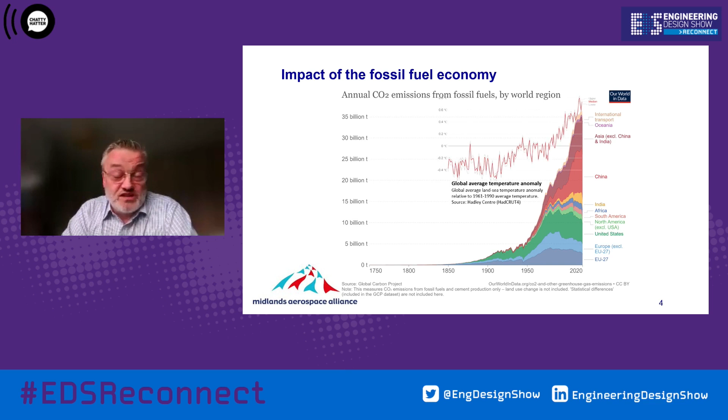So even if we froze the output of greenhouse gas emissions instantaneously, we'd still see an increase in global temperature. And the latest IPCC report is sobering reading, shall we say.

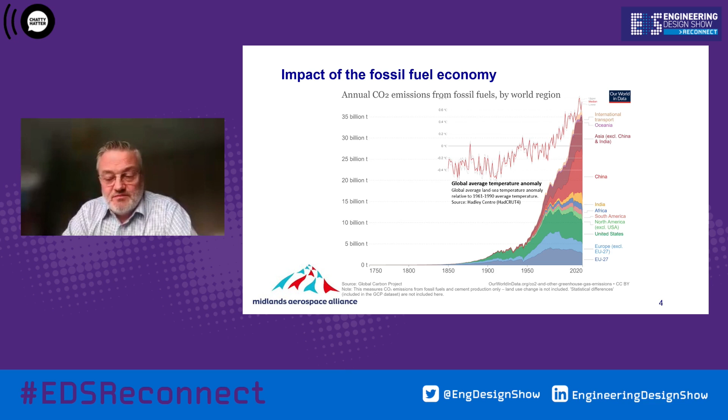With respect to aircraft, it's absolutely appropriate that we consider greenhouse gas emissions—carbon dioxides, methanes, nitrous oxides, fluorinated gases. These are the ones the Kyoto Protocol defined as greenhouse gases, and typically you see them summarized as measures of tons of CO2 equivalent, standardized into a standard measure.

But in aerospace, we also need to consider the impacts of NOx, smoke, and water vapor that turns into contrails. That's something the industry has actually been working on reducing for some decades now.

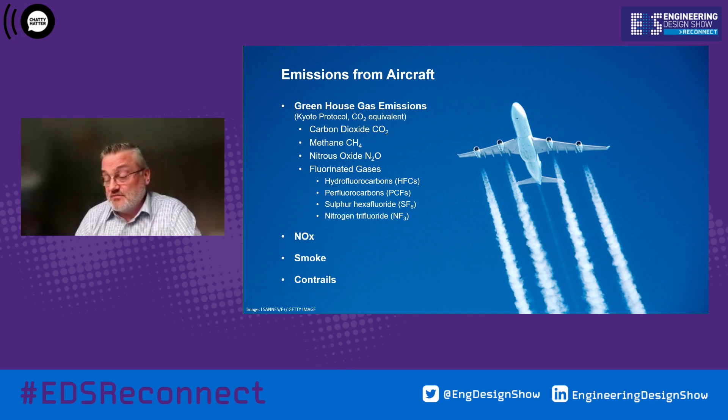So let's have a look at aviation fuel burn by sector and the amount we get through—it's quite a thirsty industry. Global annual aviation fuel burn in 2019 was 401 billion litres.

There are predictions this will increase—most assume there's going to be some sort of growth in air travel. So, no surprise, by 2050, if we do nothing else apart from modestly improve engine performance, we'll be increasing the amount of fuel we burn. Estimates vary, but typically doubling from where we were in 2019 is typical.

Just to give you a flavour, before the pandemic, London Heathrow Airport was getting through about 22 million litres a day of aviation fuel. The chart on the right shows which sectors are spending this—your small turboprops, regional jets, and business jets account for some 7% or so of fuel burn.

The area we really want to focus on is your single aisle, narrow body aircraft—A320s, A220s, Boeing 737s, etc.—typically reasonable short haul that you go on holiday to, or your transatlantic wide body aircraft, trans-Pacific, twin aisles—they're 57%. So those are really the ones we want a solution for.

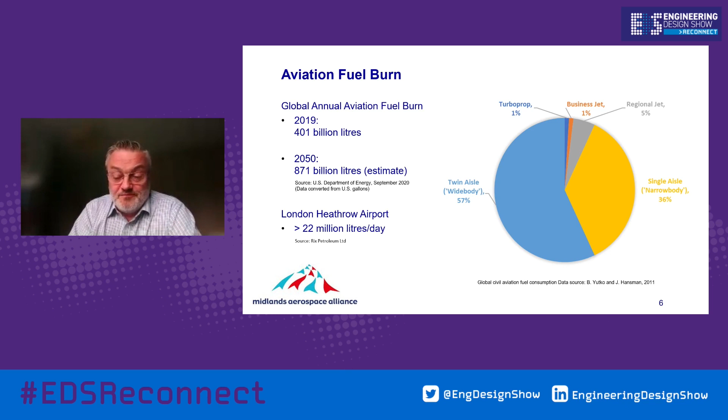So to summarize the problem statement: today the majority of commercial aircraft burn Jet A1 fossil fuel, or Jet A, whatever you want to call it—aviation fuel. Narrow body and wide body aircraft account for approximately 93% of this. Aviation is still predicted to grow, and improvements in aircraft and flight operation efficiency alone won't actually reduce this fuel burn.

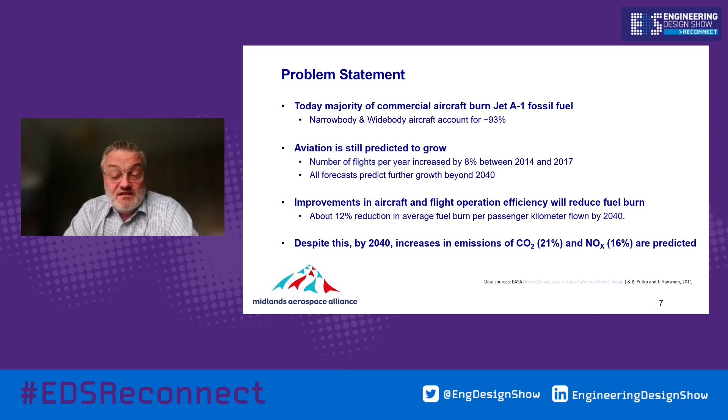So clearly there is a problem statement—we need to do something about this, and that's really where we're going to go next. Apart from one point I'd like to make, and it's a kind of sobering point.

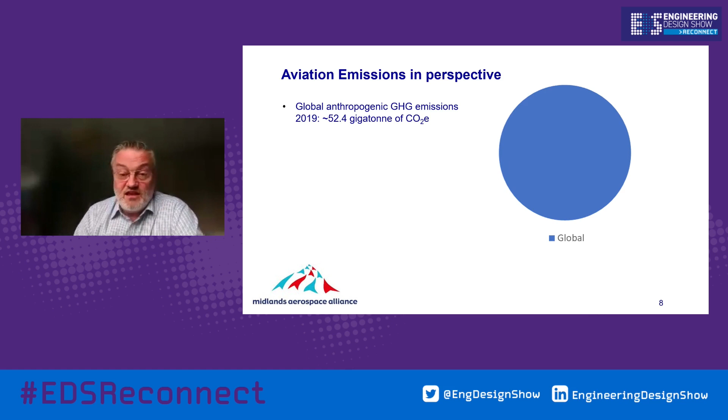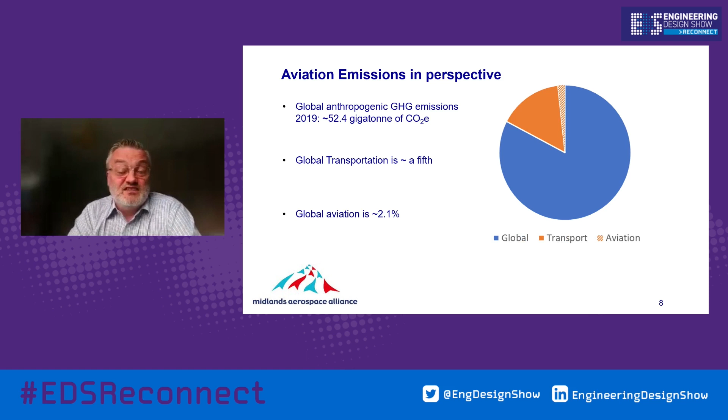If you look at global greenhouse gas emissions due to humans, in 2019 this was some 52.4 gigatons of CO2, and if we cut out global transportation, it's approximately a fifth, and then aerospace is about 2.1%, give or take, of that.

Clearly, you could argue that aviation is a relatively small impact on global emissions.

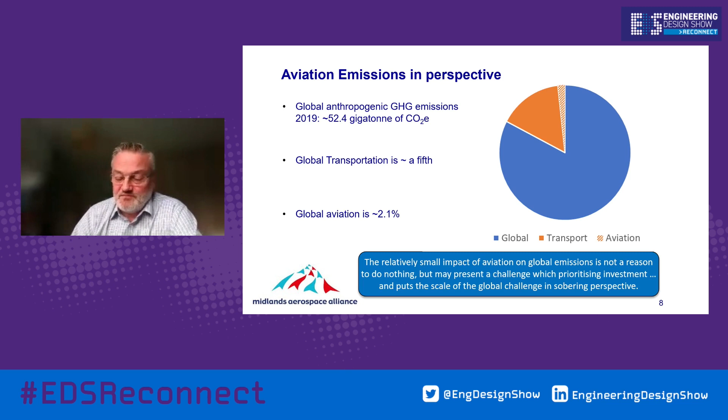But there's two points worth highlighting. Number one, this is actually an issue because it could be a factor when people are considering where to make investments and prioritizing them. Number two, as other areas improve, if aviation does nothing, it will become a larger proportion of the problem. So what are the strategies for actually low or zero emission aircraft?

I'm going to spill the beans upfront, and this is a bit of a spoiler chart, but the way I see it there are 4 key strategies, the 5th being stop flying, but I haven't considered that in detail. One approach is to reduce fuel burn, another is to use sustainable fuel, a net zero fuel as I've called it. Don't burn fuel, find another means of powering your aircraft, and don't burn fuel that contains carbon. All the answers are there, but we'll come on to those individually.

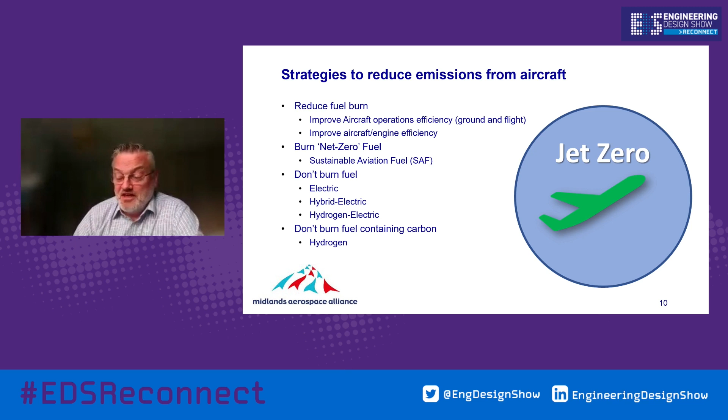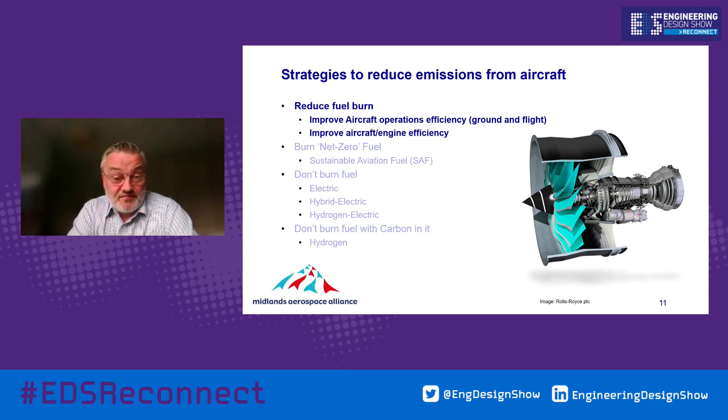So let's look at reducing fuel burn. There's two items here really: aircraft operations, and the actual airframe and engine itself.

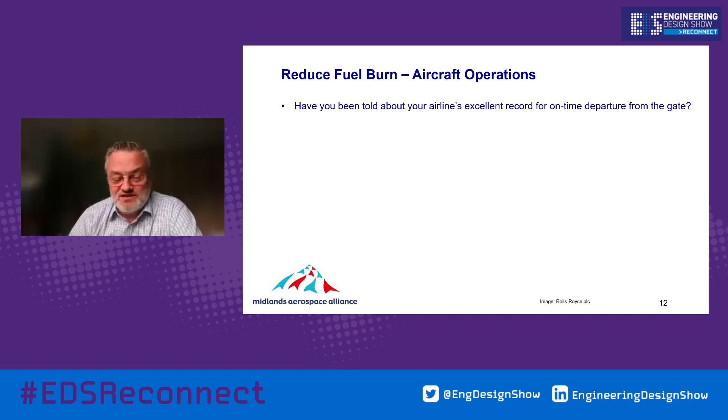So I was just thinking about flights you've had. These are rhetorical questions, but have you ever been told about your airline's excellent record for on-time departure from the gate? Some very impressive numbers are quoted. But I would add to that, have you ever been on board an aircraft sitting in a queue on the runway prior to takeoff? I have done that in certain cases for over an hour.

And in one case, we actually had to turn back and refuel. So I think perhaps gate departure isn't really the right measure for sustainability. Perhaps we should be thinking about the emissions produced during ground taxiing and setting some standards against that.

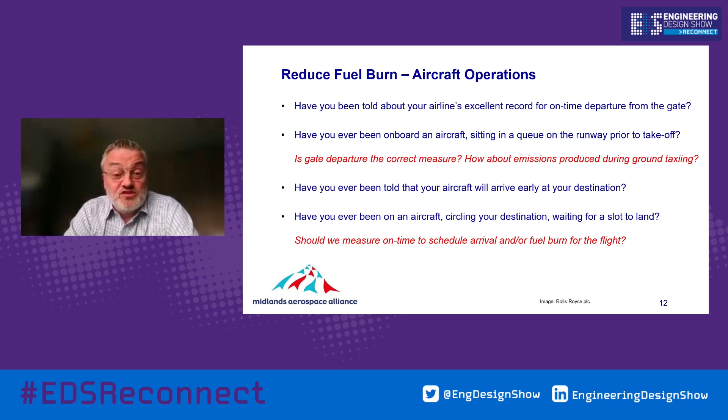The other one that really frustrates me is, have you ever been told that your aircraft will arrive early at your destination? Well, around busy airports, that usually means one thing, and you end up circling around, waiting for a slot to land because you've turned up early. Essentially it's a very inefficient way of operating an airframe, and you're burning more fuel. So perhaps we should measure on-time scheduled arrival, or maybe the fuel burn used in the flight.

But I think there's lots of scope for operational improvements, and indeed there are activities ongoing that could have immediate effect. Some quotes say 5 to 10% difference. I wouldn't argue with that. I think this is a massive opportunity. There are more technically challenging concepts about flight paths, etc., but those two can be readily introduced.

What's more challenging and more difficult is when you want to actually improve the efficiency of the airframe. Now, I have an aero engine background, more on the equipment systems side, but supporting aero engine manufacturers as well as airframers. So I'm going to focus on engine performance largely.

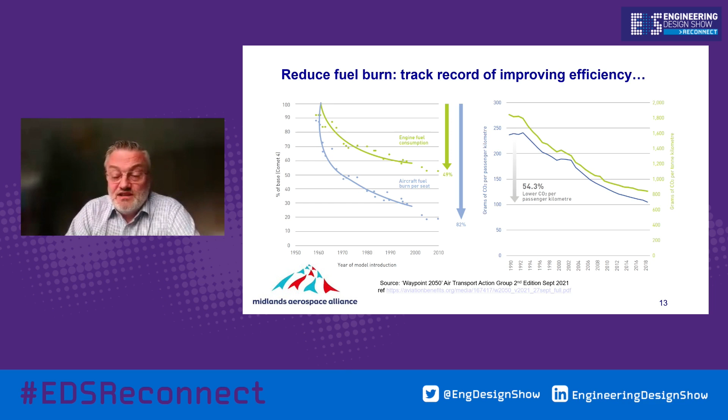As you see, we have, you could argue, a proud history of reducing fuel burn. I also emphasize that the industry has been very active on reducing NOx emissions and smoke emissions as well. Over the last 10 years or so, $150 billion of R&D has been spent to improve the engines alone, so it's a big factor. However, one thing we notice from these charts is it's starting to get more difficult to make significant steps in efficiency. What the engine manufacturers are looking at now is improving propulsive efficiency.

Essentially, you've got two options with a gas turbine. You can either focus on thermal efficiency, where we've seen approximately 0.4% per year improvement since the 70s, and that's really around the combustion and turbine area - running it as hot as you can without affecting life, and also giving consideration to how hot you run your combustion for NOx, but really it's focused on the turbine stage.

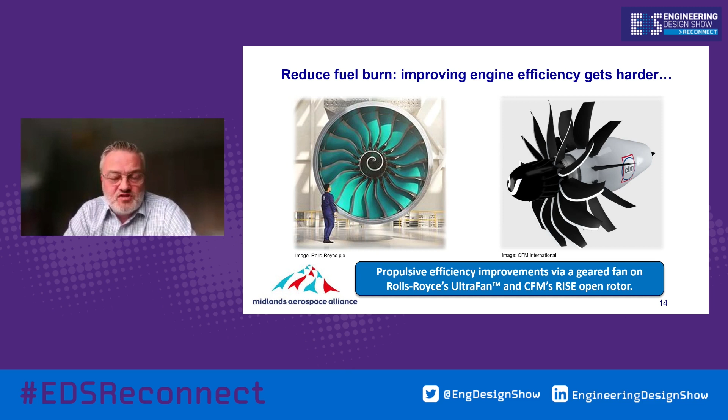And on the right there you have the CFM, which is a 50-50 venture between GE and Safran, where they're returning to the concept of the open rotor. Neither of these concepts are actually brand new. Frank Whittle sketched out a geared fan back in the 40s, and open rotors have been tested - GE did one, and also Rolls-Royce in North America. So again, not necessarily new concepts, but really making that step change in technology to improve efficiency.

But we're still burning fossil fuel. So what's the alternative to burning it? Even though we can burn it more efficiently, what could we actually do to improve the emissions and carbon footprint of aviation? So that brings us on to sustainable aviation fuel.

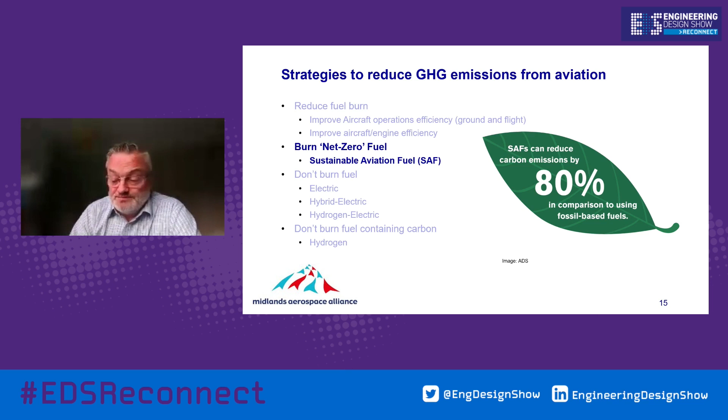So this is not about not burning fuel and not producing emissions. It's about a way of balancing it. So it's a net zero solution. And some studies estimate that if done correctly, this could achieve some 80% reduction overall.

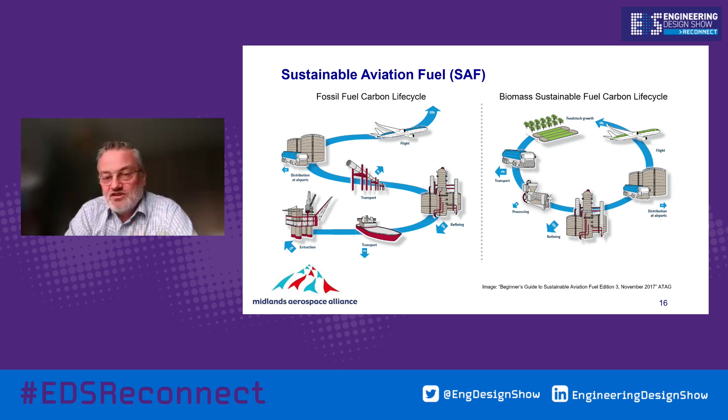So just to have a quick look at the process - and this is a highly simplified summary, so I apologise if you were looking for something a bit deeper - essentially, take your feedstock and you pre-treat it. The feedstock can be biomass, wood pulp, waste - some really exciting stuff being done processing waste and converting it to fuel. Then the conversion process itself produces SAF fuel.

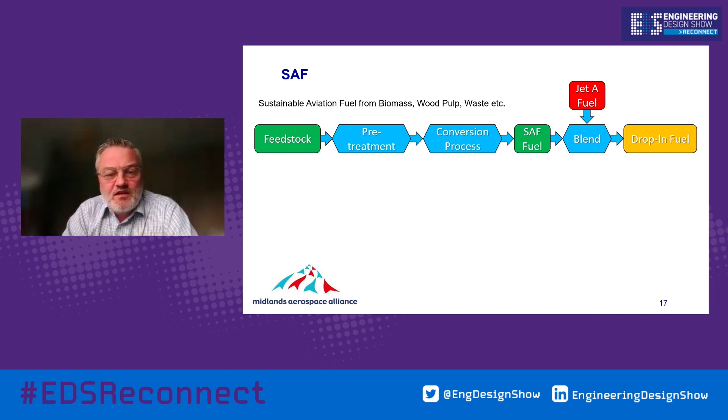So the alternative approach to that is to actually generate synthetic fuel through generating hydrogen first. We use green electricity, get water, electrolysis, which produces hydrogen that can go into a conversion process with CO2 to produce SAF fuel.

And this then again could be blended with Jet A to make sure it has the right properties, so it can be what we call a drop-in fuel. By drop-in fuel, I mean it can go into an existing certified aircraft, and the fuel is certified so that it's cleared for those existing aircraft.

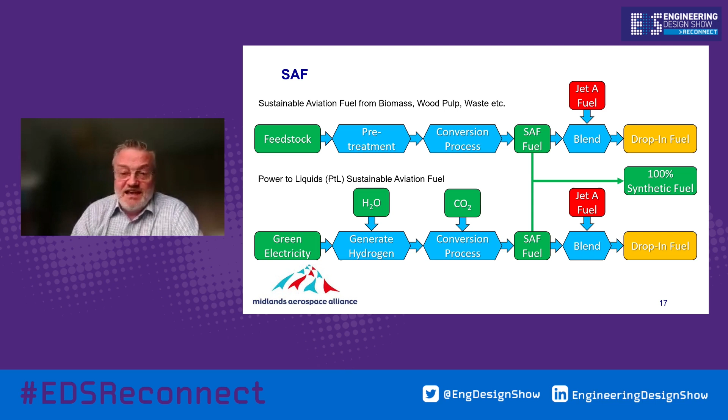Ideally, we obviously want to miss out this step and go straight to 100% synthetic fuel. I'll just explain the slight challenge that presents us in the short term.

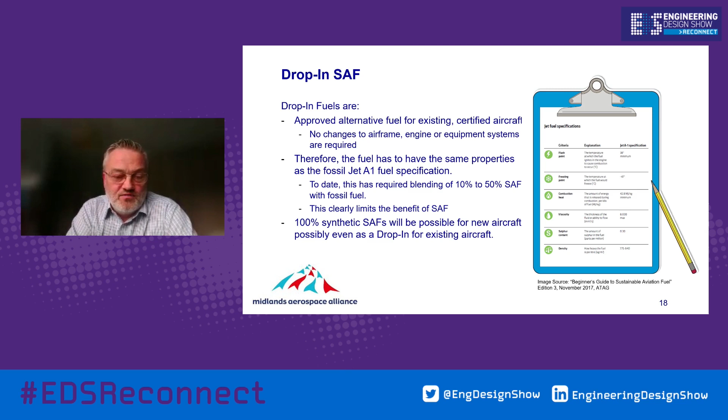So as I've said, we're showing a checklist against the fuel properties, but there are numerous bulk and more subtle properties of fuel we need to consider to ensure this is like-for-like equivalent to Jet A1 fuel. It's not just about the energy content, stability, or combustion characteristics - it's also the flash point, freeze point, density and viscosity, surface tension, lubricity, corrosivity, and all the other terms we make up in engineering.

So we think, anyway, it'd be great if since we're making a synthetic fuel, we might as well take those aromatics out. But if you take those aromatics out, you're changing some of the properties of the fuel. One example: the nitrile seals used in the fuel system, if they've been exposed to aromatics, will have swollen - that's the effect aromatics have on them, and that makes a great seal. If you start using a fuel with no aromatics, those seals will no longer swell, and so you can't assure yourself you'll have the same level of sealing.

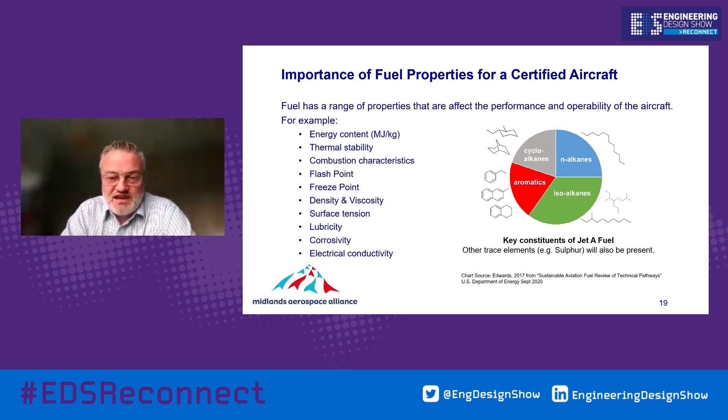Lubricity is another factor, a little more subtle in the constituents that give the fuel its lubricity properties. Take for example the main high pressure fuel pump on an engine - there's only one per engine, and it operates under incredibly high pressures, with a huge pressure differential across it, typically over 1,000 psi pressure drop across the pumping elements. The loads to keep the gears - typically gear pumps - and thrust face loads in particular require each company that provides them to have its own unique blend of surface treatments, but they are absolutely dependent on the fuel's lubricity characteristics, so we need to retain those.

The be-all and end-all of SAF is that it could actually make a significant contribution if you can get a drop-in sustainable aviation fuel - ideally a drop-in synthetic fuel that has all the properties of Jet A1 but doesn't involve any blending. That's really the panacea we need to get to quickly.

However, there's still a challenge in the availability of feedstock. I don't think that's such a big issue in the longer term, but right now we're certainly very limited in the amount of SAF being produced. It also costs more than Jet A fuel today, so we've got a challenge ensuring airlines pick it up, and then there's an incredible amount of investment needed to ramp up production and global availability.

Even if we want to get to 1% availability of sustainable aviation fuel by 2025, we're going to have to produce 10 times what we have today, and 100 times to achieve 10% by 2030. So you can see the level of investment - globally this is a trillions number we're looking at.

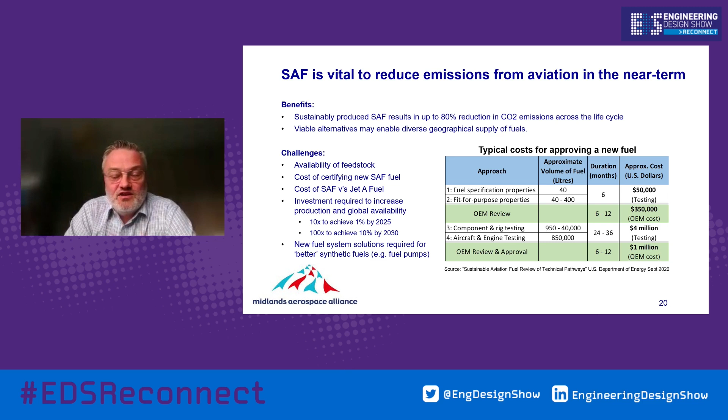So we've covered reducing fuel burn by better use of your aircraft and how you operate it on ground and in the air, getting the efficiency up. We've seen 2 examples of new engines being developed around propulsive efficiency improvements, and sustainable aviation fuel, where we can make significant reductions in overall net emissions.

However, if we really want to make a step change and not have any gaseous emissions, then the answer is not to burn fuel. So let's see what the options are there.

Electric flight: ideally we use a battery to power typically a propeller. Some people prefer to use a high-speed fan, but whatever means you choose, great steps forward have been made. We're seeing a gradual increase year on year in battery technology, with new battery cell compounds really being brought together to improve battery performance.

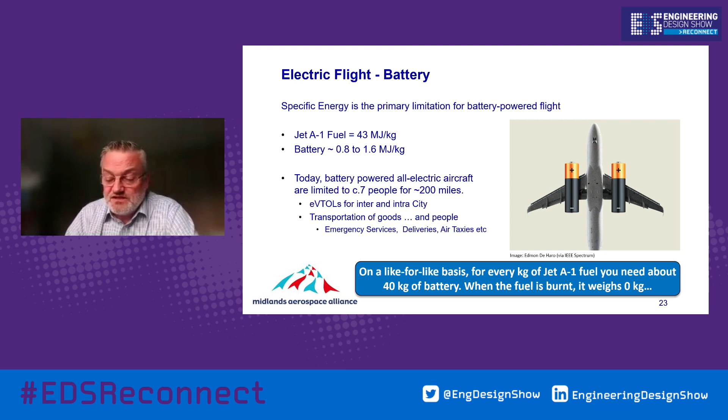I think we'll see these aircraft - I've used the example of people for 200 miles, but in reality I think we'll see these predominantly initially around ferrying cargo. Some exciting opportunities, but not really addressing the big issue. If you remember the diagram of the 7% versus 93% split of where burnt fuel is, we're not getting into the big area of long haul and short haul aircraft.

So for electric flights, the hybrid electric approach - I remain curious and open-minded about these combinations. There are various combinations when you talk hybrid electric. It often involves trying to compensate for the battery's limitations, either by having ways of charging it during flight, or adding gas turbines to take some of the load off the batteries and complementing with gas turbines, generators on board to generate power, and fuel cells in combination.

And I do bring it back to one of my earlier comments about the drive for simplicity. I do find some of these systems look rather overcomplicated and heavy.

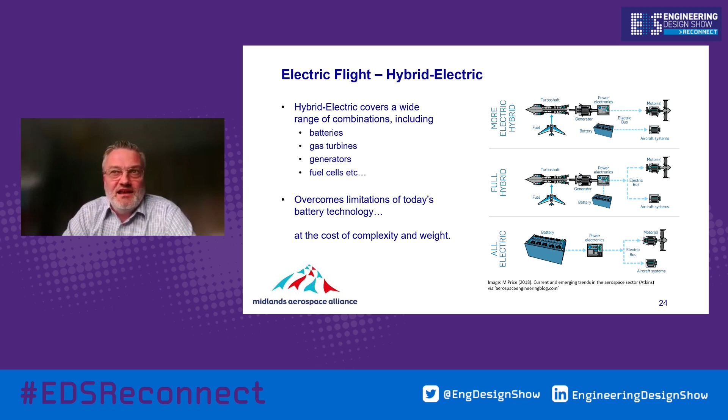So the one that I think really is much more attractive is actually the hydrogen electric. Now it's somewhat unfair because the work I've done on hybrid electric is somewhat limited, it's more reading than actually doing. But the hydrogen electric looks to me a more promising and simpler solution.

So essentially, you have hydrogen fuel, which feeds a fuel cell, which powers electrically a motor, and then you rotate your propeller. Reasonably straightforward concept. I think the real key here is the development of the fuel cell.

Clearly you need a supply of hydrogen, but for the smaller aircraft people are looking at initially, hydrogen supply will be a factor, but in gaseous form it is a solution that can be solved. Certification is also an issue, just because it's new, and our certification is so built around known technology rather than new technology. It presents some little challenges that need to be addressed, but I don't see them as stoppers.

I think the key thing is getting the fuel cell technology, and one of the problems with fuel cells is their efficiency. Crudely described, they're essentially a sort of battery that generates electricity through replenishing of fuel, the fuel being hydrogen, and the output being water.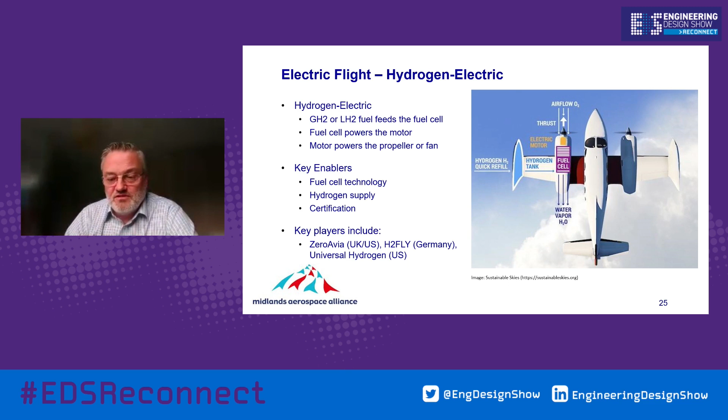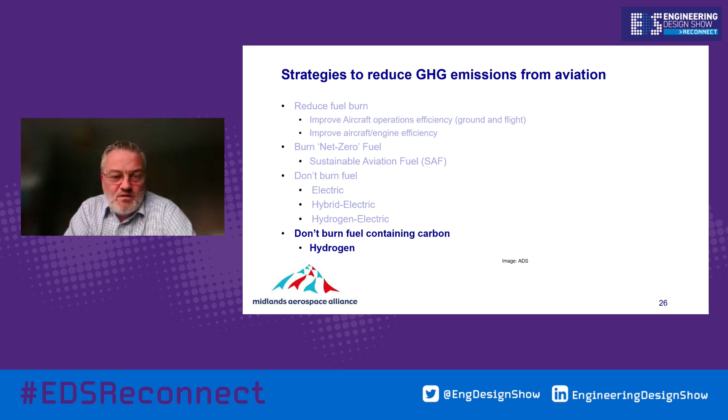So we tried not burning fuel, but so far I've managed to describe aircraft that can go, say, 200-ish miles with current technology, with a relatively small cargo or handful of passengers. We've described the potential of the hydrogen electric and the fuel cell, and that is something to watch. But I think we haven't really entered the 93% area. We haven't got a solution for our narrow body aircraft, and we haven't got a solution for our wide body aircraft. So the next section is really moving into hydrogen.

I haven't gone into nuclear reactors and other such ideas on planes, but there is a lot of talk again about hydrogen. Hydrogen was looked at a number of times, and the Russians and the US have done flying demos for different motivation than carbon dioxide and other emissions. But anyway, in theory, it could work.

The beauty of hydrogen is, number one, it doesn't contain carbon, so you don't get any CO2. Its specific energy is superb, superior to Jet A, 120 versus 43, so three times more. But the energy density just needs more volume, and that is a problem.

To get even to that level you'll see the LH2 there, the liquid hydrogen, and that is one of the challenges. Liquid hydrogen means you're storing it at about 20 Kelvin, and then miraculously feeding it to your gas turbine. Gas turbines run on hydrogen today, they run on hydrogen gas. Gas and vapors are the things that actually burn, so that's what you want to feed into your gas turbine. You're going to go from 20 Kelvin to 300 Kelvin plus, maybe, in a relatively short space.

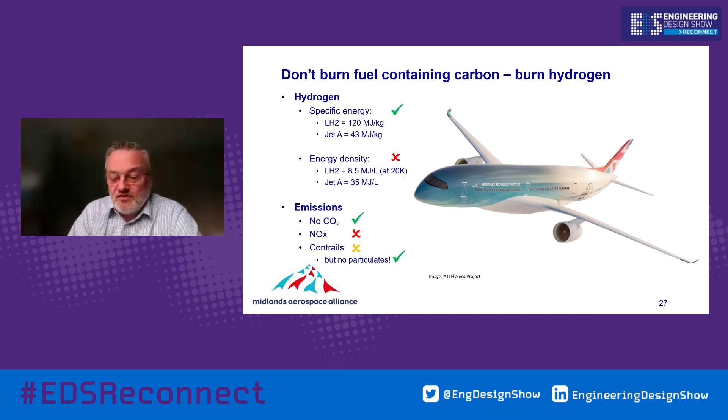So there we go, the challenges I've described, some of the challenges in hydrogen. First and foremost, we need a hydrogen infrastructure if this is going to work. You can't just have hydrogen globally distributed and available at airports just for aviation. The business case for that just wouldn't exist. And although we transport liquid hydrogen today, very few people actually store it and use it in that way. So that would be a uniqueness.

There's lots of unknowns about the environment as well, and it's a fascinating area for engineers. Absolutely fascinating, lots of challenges.

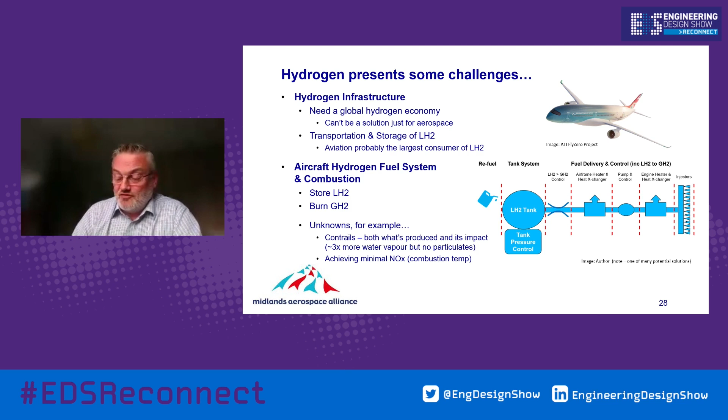And so here's my rough summary. This is very much a personalised view, and it changes on a monthly basis, I think. But the key message here is, if you take the middle of this chart and look down, that's really your sort of area that's consuming most fuel today. And really, what we're looking at is that sustainable aviation fuel, we need to really drive and focus on that and look to the more longer term solutions. And at the moment there's a lot of people pushing the hydrogen concept, which is, as I say, very exciting for engineers.

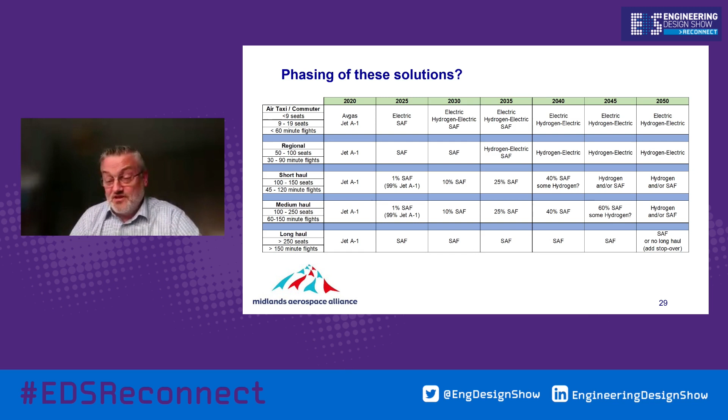And material processing is actually quite high in aerospace, higher than the footprint of emissions from processing materials in automotive generally. And then the manufacturing methods, transportation, in-service utilization, and then ultimately the end of life and re-life. I think this is an area of opportunity. We could actually be more aggressive in repair and recycle and reuse. And there's also other options such as rot and minimizing what turns up as refuse. So I think this is a broadening of scope for the design engineer, and something that will need to come into our thinking very, very quickly if it's not already there.

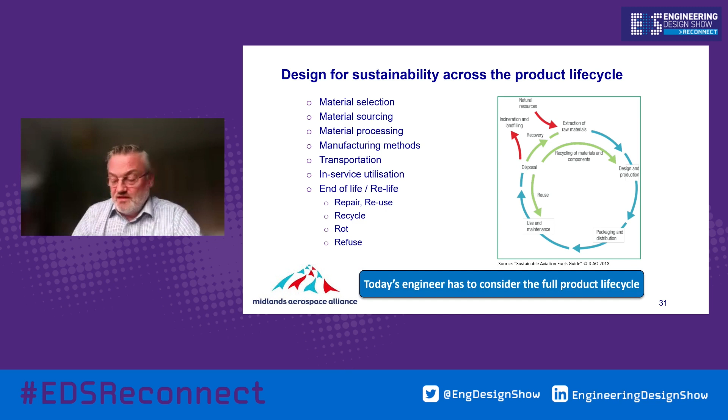So that was the message there, to consider the full product life cycle. So in summary, there's no single silver bullet to address this challenge. The nearer term opportunities are operational improvements and sustainable aviation fuel. Electric will work for short-range vehicles, and regional hydrogen electric looks promising. But to make a real difference to emissions from aviation as a whole, it's going to be SAF first, and then we see where we go with the hydrogen economy going forward.

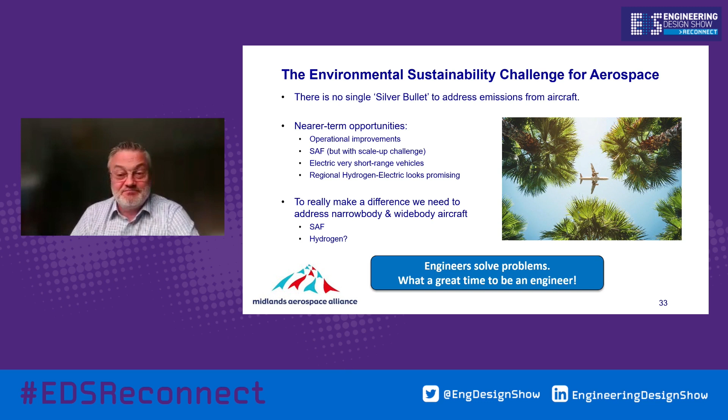But I would summarise: engineers solve problems, and what a great time to be an engineer. Okay, thank you for your time. And if you have any questions, I'm happy to answer them.

Okay, so got one question here. Do you think the eVTOL aircraft will be a growing market, and if so, which designs will win? Well, I'm not an aerodynamicist by any stretch of the imagination, and I'm not really a marketeer. But when I was young, I used to read Look and Learn magazines, and they had articles on history and science, and they showed flying cars all the time. So I was always imagining that by now I'd have a flying car.

I think Asia is very interested in intracity travel and short-haul air taxis, and they're highly motivated by that. I think it'll be more difficult in, say, this part of the world, but I do think cargo transportation between cities is something that organisations like Amazon are very interested in, and I think that's probably where the greatest opportunity lies, and also difficult to reach medical supplies and emergency rescue. How big that market is, I couldn't say.

The only other thing I would say is that I see some designs with lots of high-speed fans, running a motor at high speed where it likes to be running a fan at high speed. But I'm curious about the overall efficiency of that packaging, especially when you have lots of fans. I prefer to see fewer propellers rather than fans. A propeller is generally more efficient at these sort of speeds than a fan, and you probably have to just accept that you need to run your motor faster than a propeller, so you probably need to package a nice, handy reduction gearbox in there. But I'm not an expert in this field, so that's just an amateur's assessment.